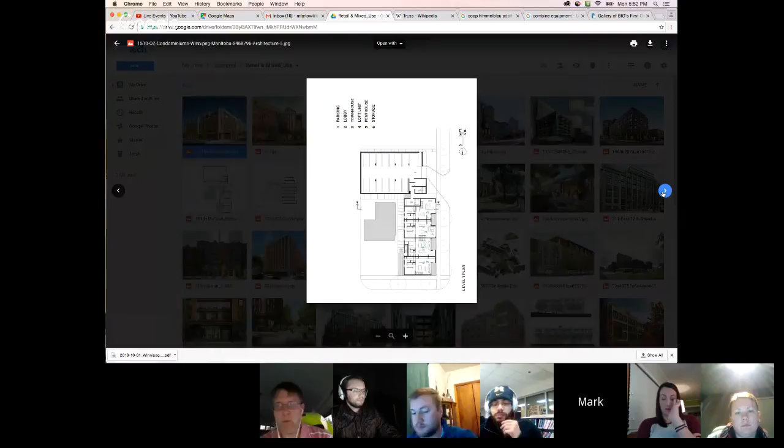And the building steps back from the street, so that from the street, this building only reads as a 6-story building because the top floor is held back. Oh, I love this building.

This is again a very simple strategy, a very simple brick volume, sitting not concentrically on the base. It's cantilevered out over the sidewalk, over this retail promenade. You see the soffit with the downlights in it? So that's like a 6 or 8-foot, maybe 10-foot cantilever that maybe finds some resolution back here.

Or maybe, because I don't know this building that well, maybe this skin down here is in the same plane as the brick skin above, or maybe just like a 1-foot, 18-inch offset, but then it splays to a greater dimension, therefore to a greater cantilever as we move out towards the street, so that the sidewalk is tapering just as the soffit above it is tapering.

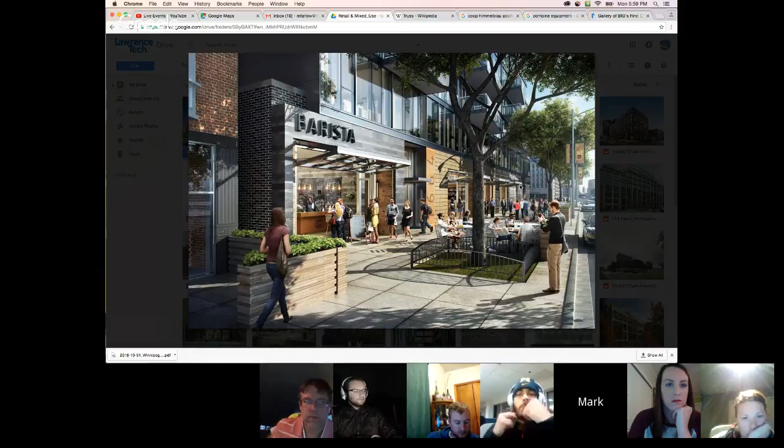They actually control the conversation in terms of what can happen on the ground plane, what can happen on the sidewalk, what can happen when the retail spaces open up, the way this barista coffee shop is described, with this hinging up and down door that creates a wonderful moment of theater every morning and every evening when it opens and closes, and how that connects us to the sidewalk, and how life on the sidewalk can engage with that retail tenant.

The same building again, up close. Terracing back at the upper levels allows the building to have a little bit more modesty, although this is a pretty hefty building.

I think this is actually clumsy in the way that it's rendered. The brick is a bit peculiar, and it has the vibe of an office building. But it begins to show you that within repetition, you can create difference and distinction. Notice how the spandrels in the middle part have this bronze color, while the spandrels everywhere else have the masonry lintel or masonry spandrel. These are moves you can make to reduce the heft of a building into something smaller, a little more graspable.

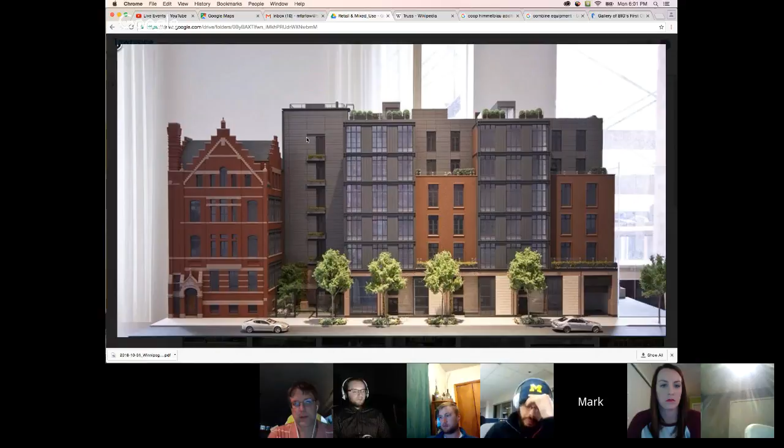It doesn't all have to be brick, doesn't all have to be bronze. Notice how this building is a series of simple, punched, large double-hung windows in a much larger orange window frame. I suspect the mechanical units are in the sill of each window. Actually, that's a grill rather than a window, so this is like a balcony, so these windows open up and you can probably step out onto that balcony. Notice how the jambs and frame of these windows are this burnt orange color, and it steps back at the top with little moves that reveal the rooftop.

Also notice this is just a simple, maybe corrugated metal sided building. As we move down the street, the building steps down to meet the context, and the figure-ground reverses. As it turns the corner, the gray field color becomes the field color for the windows, and the orange color for the windows on the front and side facade becomes the field color for the building. So I love this idea that with just two different colors, the gray and the orange, you create a really straightforward palette for a very large building.

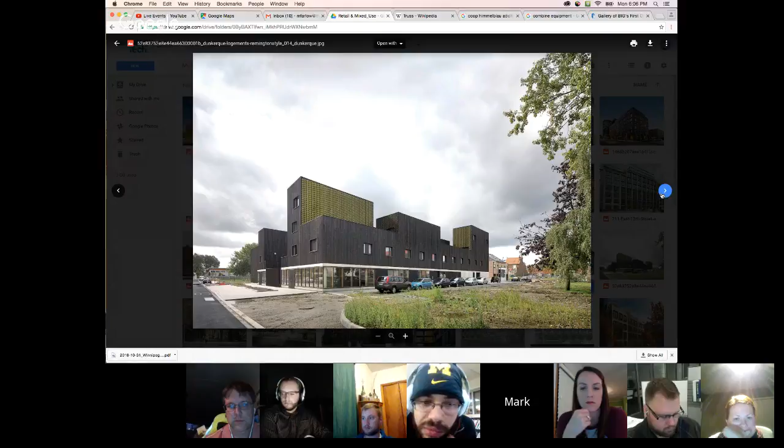This building is in scale with everything in North End. It may be longer, may be wider than some of the pieces you're looking at in North End, but this is right in your wheelhouse.

3 stories, 2 stories, 4 stories. Notice how the 4-story only happens in a couple of conditions, and it's always next to 3-story things, or next to a roofscape like here on this corner. Notice how the corner is all glass and opens up not only to the street but to a large sidewalk area in front.

The idea of letting the roof play a role in the building form, letting the building form relate to the context by mortising the mass so that volumes stick up and volumes recede, is a way of commenting on the rhythm and texture of the North End neighborhood.

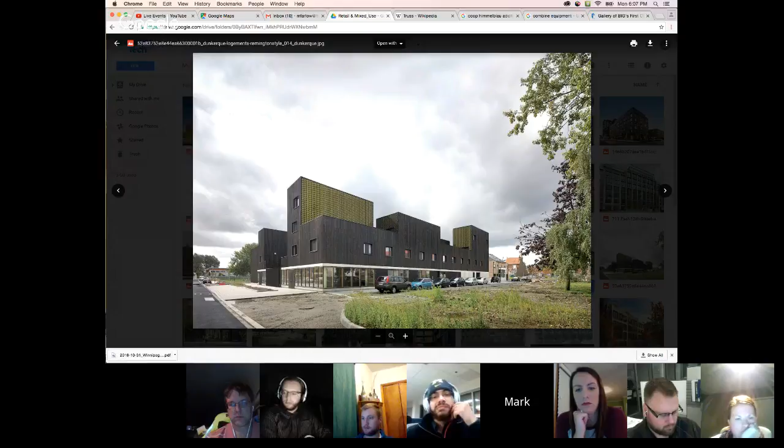This building is very, very simple. 3 materials, one of which I'm not even sure what it is, kind of a green, spongy egg crate facade. Maybe it's all wood in that chocolate gray. Very simple windows, very simply framed. Maybe not enough windows for my money, but that's in contrast to the ground floor retail, which is certainly all glass.

Bigger buildings tend to have a lot more detail. We just saw one a moment ago that was pretty rudimentary, highly flexible and active in its massing, and very simple in its language of materials.

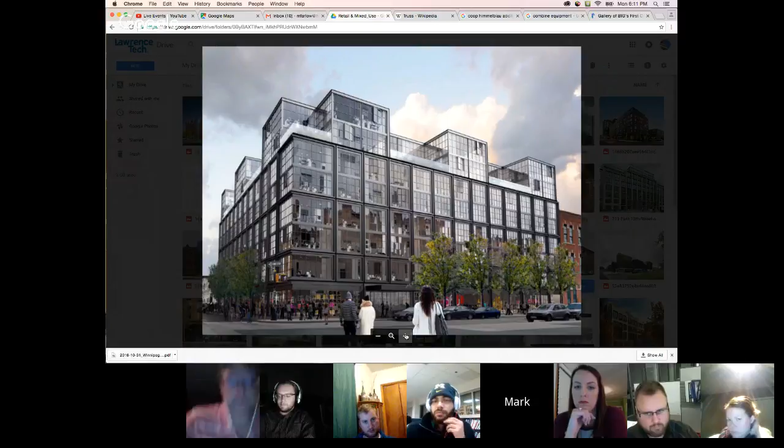Another building that we fancy. This is kind of trying to pick up on the warehouse aesthetic of the windows—much larger curtain wall windows inside their own frame, and then each of those large window elements is broken into smaller panes, reminiscent of an Albert Kahn factory or a Dudok factory in the Netherlands. But notice the roofscape—it's a much more active volume. This is something you can do on larger buildings.

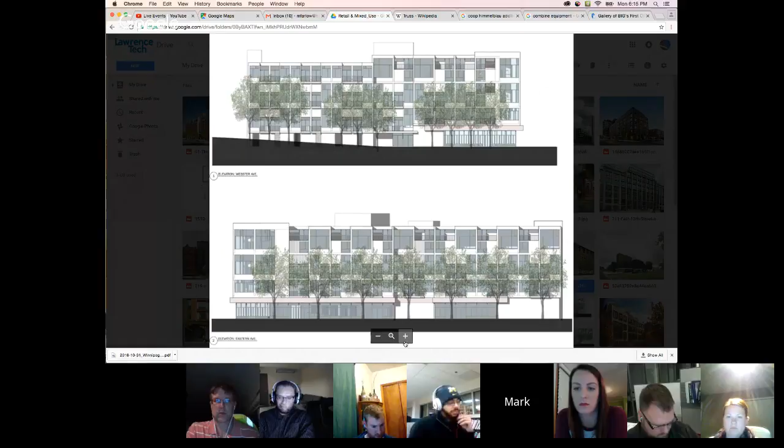Again, simple palette, right? You can imagine this as a 2-story, 3-story, or the 4-story that it is. It's actually a 5-story building, because the terrace is set back. This is a wood facade, with the wood running vertically. The windows are framed and extruded, giving some sense of shadow and depth to each individual opening.

All right, we'll go past that. And then just talking a little bit about, maybe thinking of the ground floor as everything from 15 or 20 feet, whatever your floor line is, thinking of everything below that line in any mixed-use building you're doing, maybe the corner spaces on your building, letting that be its own thing.

It can be quirky, informal, varied like you're seeing here. It doesn't have to be lowbrow, but look at the power of simple blade signs, simple strung lights, and simple front doors with a little topiary out front. It's actually a very attractive detail, and it allows the pedestrian to feel comfortable enough to walk inside.

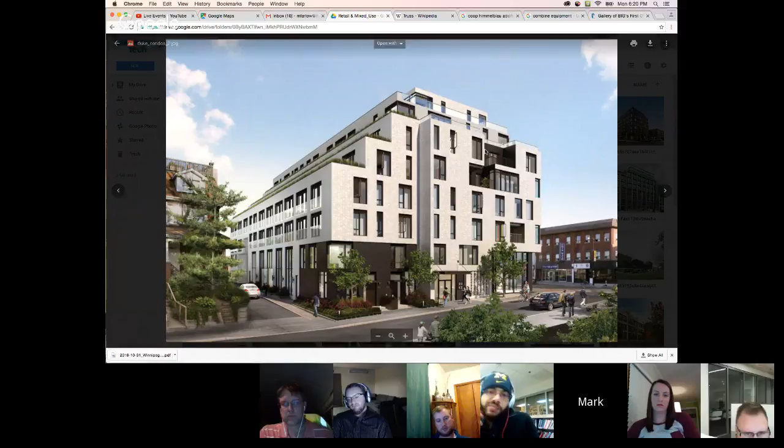I love this little notch here—it's like when I think of putting my key into a slot in my front door, I think about all the zigs and zags the key has in it, the shape of that male component, and then I imagine what that lock set must look like inside, and that's sort of what is happening here. So when I see these conditions in buildings, I think about how that might be relating to something across the street, how it might have a conversation with the context.

The same building, showing you the condition of the terrace and how those really are part of urban life. I'll blow that up so you can see it. This is a rendering, so we should talk a little bit about money shots as you look at these.

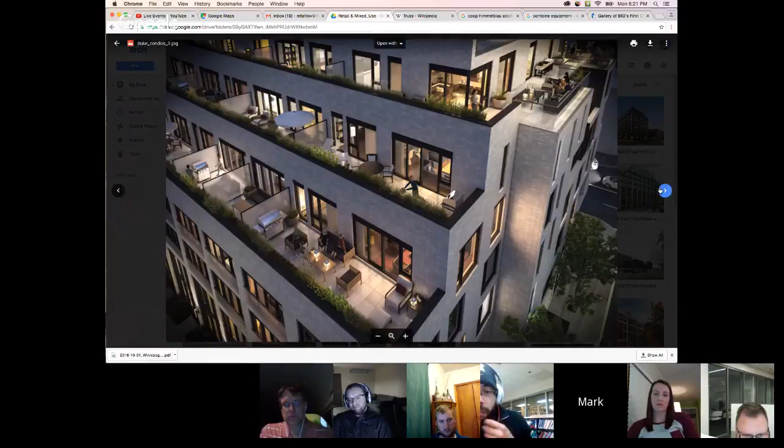The first floor. I love how the first floor is given this 2-story arch, right?

And that same view, that same space looked at from an oblique angle. Notice the sidewalk, notice the planters.

Remember the male-female keyhole that was happening obviously on that view. That's the one we were just talking about, but it actually starts to operate more assertively on the front facade in L-shaped and Z-shaped and T-shaped kinds of conditions, so that it allows this big hefty mass to be read as something smaller.

This building is in the wheelhouse and scale of your buildings. I think we talked about this last week. Mark? Actually, you showed us that.

Go ahead. Anna just texted me asking you to re-invite her to the chat. Sure, I can do that. She having trouble tonight? Apparently she lost power for a second. Oh, dear. It's back now, but... Okay, thanks.

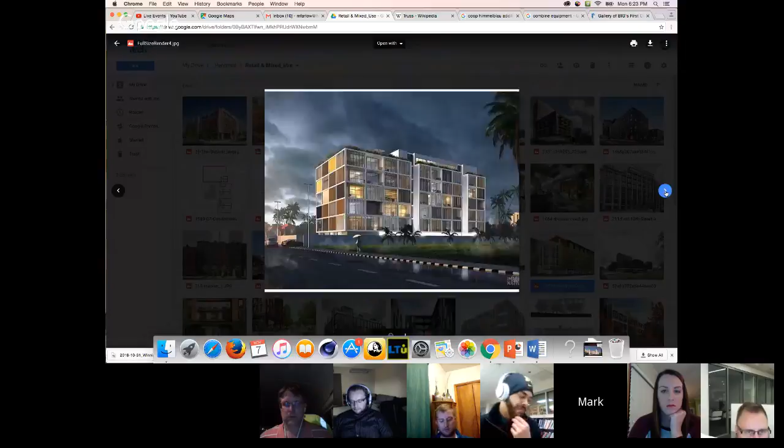It's a lovely piece. It's probably a Lumion rendering. The courtyard again.

And I think that was a rogue shot. Again, that sort of keyhole notch, that mortise, that operates very successfully, two buildings really joined at the base.

This is really interesting. When we go to Cincinnati, we're going to see a piece by Moore, Ruble, Yudell, the Steger Center, and it uses these double height dormers, or bays, rather, right? See these two bays here?

They're kind of like when you open a can of dog food, speaking of beagles barking, right? When you open a can, you pull the metal lid away from the body of that can, and it creates that kind of new composition, right?

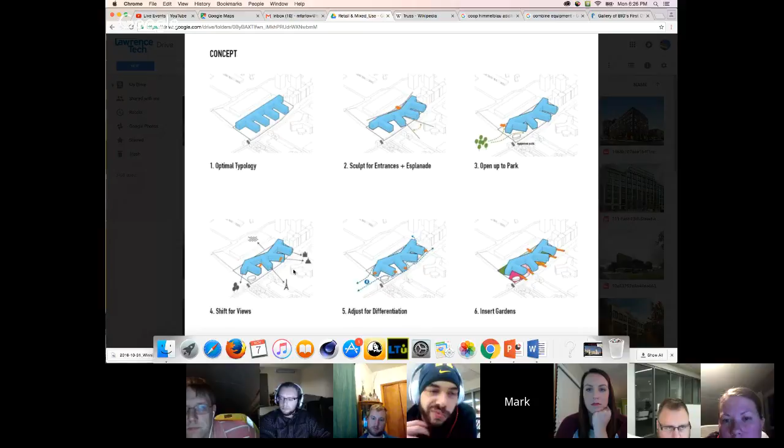That's what I was talking about with the mortise, the key and the keyhole, letting the architecture point to or react to conditions beyond, so that there's a kind of knitting that starts to happen between context and form, and then allowing the diagram to actually explain all of that.

And then you end up having a kind of drawing like these two at the very bottom that shows the synthesis of that. This is a really, really important kind of drawing for you to be doing as you move towards the second benchmark. It's a way of explaining how you actually created form and how you modify form, in terms of letting the context or program operate on it.

And that drawing, that series of drawings, was for this particular piece. Another terrific small 4-story apartment building. You know, this is again on the scale of the things you're looking at, right?

A 3-story building with a 4th floor that's set back. 4-story building on a retail ground floor to hold the corner, right?

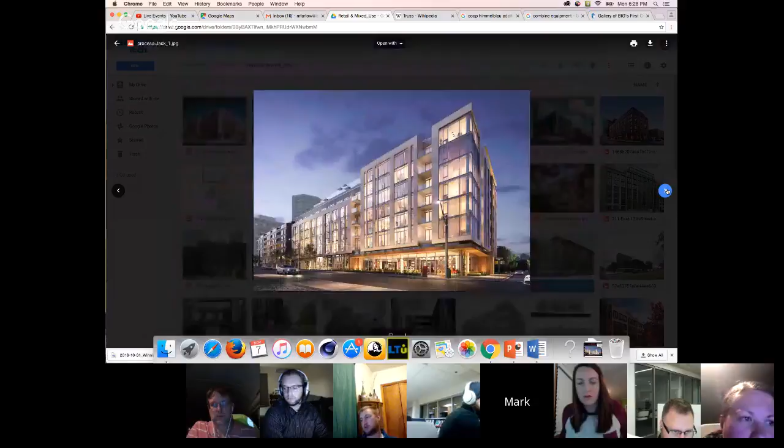The diagram, right? Taking kind of a pure program sort of diagram of your site. You all did these, you have these in your wheelhouse, you have these in your portfolio right now.

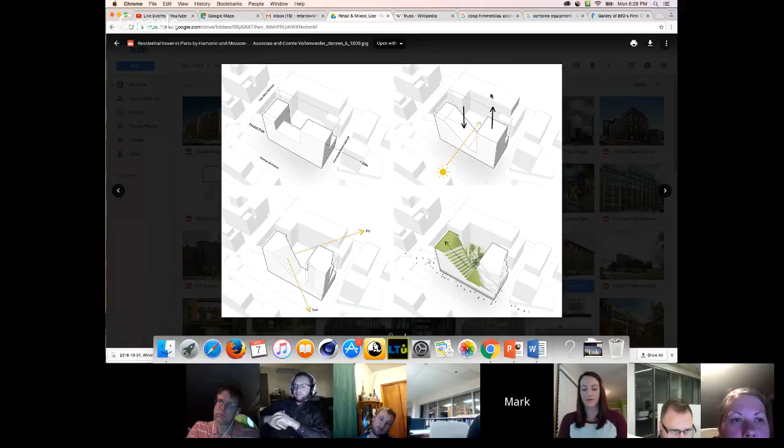Starting to think about how this property and this piece of land gets sun, so you push down on the mass here. That action of pushing, like pressing dough to make bread, when you push down on something there's going to be a reaction against that push. That means this piece is going to rise as this gets compressed. And then views, to one direction or the other, allow that push to get reoriented, and then the drawing is complete.

And there's that building, again.

This is actually a building by Richard Meier, his own museum for his models. His models are all upstairs, and this is all outdoor space upstairs. So it's just a 3-story building that sits next to much taller properties to the left and right. Again, real simple materials - just brick, metal, glass. But notice how the brick has its own detail, so you get these little moments in the vertical where it's rotated out to give a lot of texture. We saw this one earlier, and I think that's it.

I wanted to have this conversation tonight to open up the palette a little bit, to make sure that as you move into your work for the 16th, you're thinking about a lot of things right now - certainly the floor plans, the units, and the site plan. That's all stuff you've been thinking about, and that's great. But now you need to be applying that same rigor to the architectural outcome - the elevations, the massing, the three-dimensionality of this building, and the materials it's going to be sheathed in, and the way you can start to imbue those new questions with more design rigor.

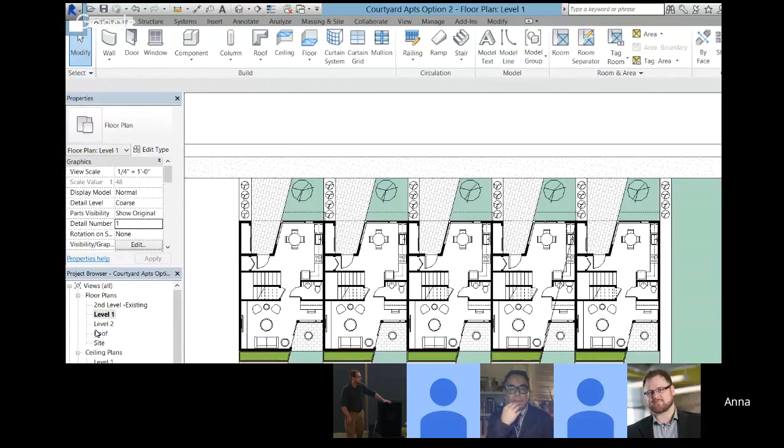Because as I was looking at it in elevation, like you had been talking about, expressing the vertical, or expressing the individual units more than anything - the way that I had it, it really was becoming kind of difficult to break that up. So by putting it back, I was able to express like, okay, these are the individual units, and it worked better with what I was trying to do with the roof line as well.

Can you orbit up? Can I see this balcony roof? Yeah, do you want to see it in 3D? Yeah. So I did the butterfly, and then I just took that little corner and tilted it down, so it still speaks to the gable roofs without being a gable roof, you know? And it kind of helps to further express the individual units.

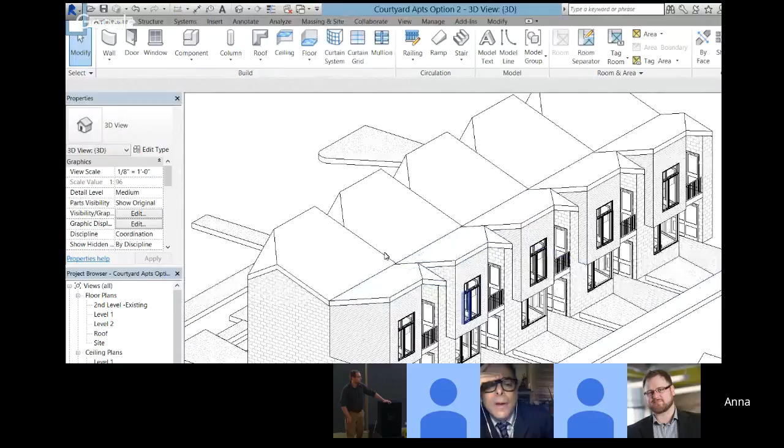So can you rotate around even more? It looks like that, I see. This is very interesting - can you rotate all the way around? I want to see the back. Oh yeah, the back side, I essentially did the same thing.

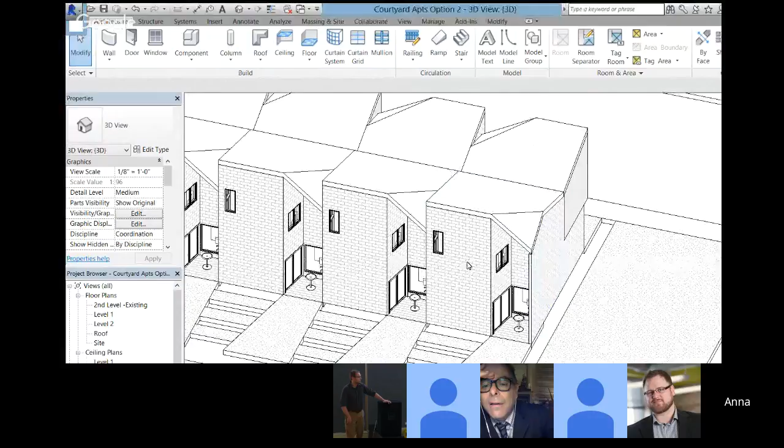The one spot that is a little weird is this far right corner, kind of highlighted right here. Well, can you slide your model - your cursor, can you see? I actually like that. Yeah, because initially there wasn't this wall here, and the roof came down, and I was like, okay, well, I got to do something because it looked obviously weird just having the roof. Where is your ceiling in all of this?

This is the second floor ceiling. What's the second floor ceiling line? It's technically here, let me go into elevation - is it just a few feet? Yeah, there it is. So it's really at the transom. So this roof that comes down is really at the ceiling line. Yeah, the lowest point there, where it tips down. Yeah.

Can you rotate counterclockwise in elevation? Oh, okay, counterclockwise. So you want to see? Oh man, no, I'm confused. Sort of want to see the... You want to see how the side profile is? Yeah, but I want to see the architecture in that elevation. So I don't want to see it as a pure elevation. I don't know if that makes sense. I want to see the elevation obliquely.

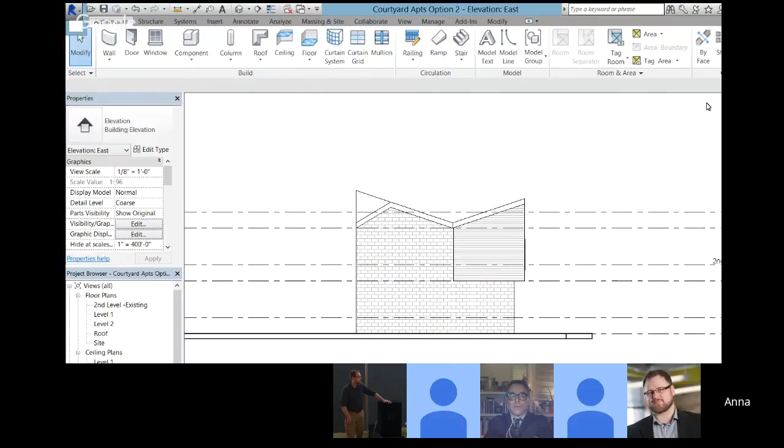Okay, I wonder, so rotate it like 10 degrees. 10 degrees, oh boy. That's the 2D wheel. I don't know if I know how to do that. Let me see, you're a Revit master. I thought so, but I don't know how to do that. Can you just go to 3D and rotate?

Yeah, so get me down to the eye level, like there-ish. Yeah, now keep turning. Slow down, keep going. Is this the side I want to see? This is like the back. You want to see the front? Go to the front. Okay.

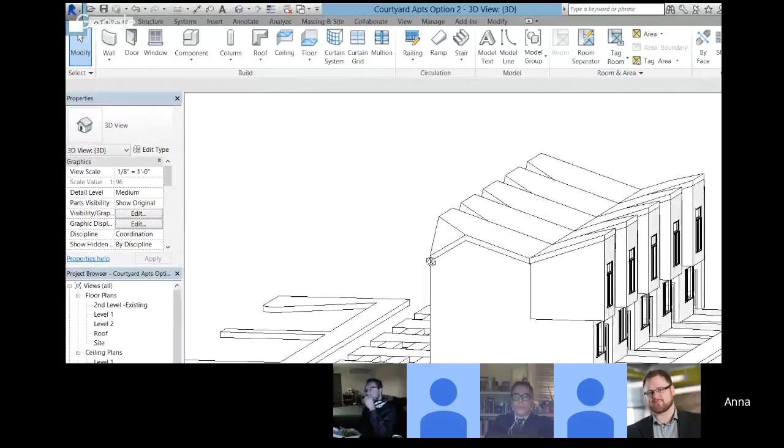I want to see the other direction, so rotate all the way around. Okay, now slow down. Oh, too far. Yeah, and get me at the eye level again. And open it up a little bit more, I want to see more of the facade.

Yeah, so you see where that roof comes down and it hits the, it looks like block, where your cursor is. So there's like a big drain issue there, so you'll have to have a downspout there. And then this change of masonry to siding is kind of interesting.

I feel like there's some line work that you're missing there. And you also have, in these things that project out, masonry and siding kind of intersecting. Wherever there's wood siding, you're going to need a bottom board, and you're going to need a corner board unless they're mitered, and you're going to need an end board, like a vertical end board.

Do you follow what I'm saying? So you need to indicate all of that. Trim, essentially. Yep, unless you have a different attitude about wood that you're trying to talk to here. The other thing is these fascias are kind of snug to the wall. They would actually at least be one or two boards proud of the wall.

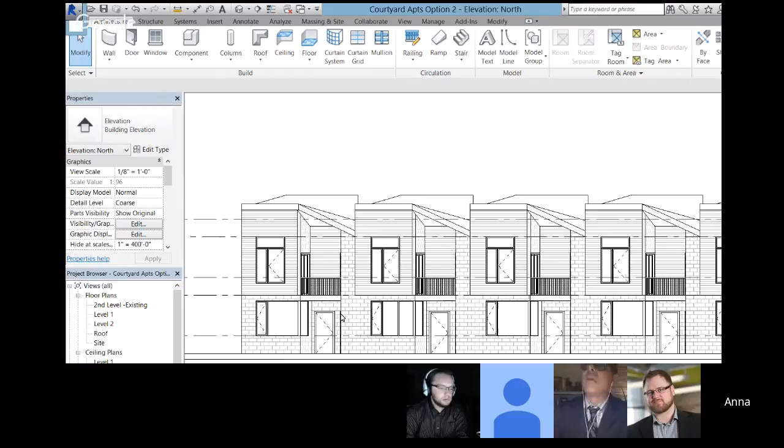Okay, let's keep going on this then. Are the roofs going to be like a metal skin, like a standing seam roof? I'm not entirely sure yet. I'll go to the roof plan. I have it shown right now, like with the texture of a typical shingled roof, but I definitely don't want to just do an asphalt shingle.

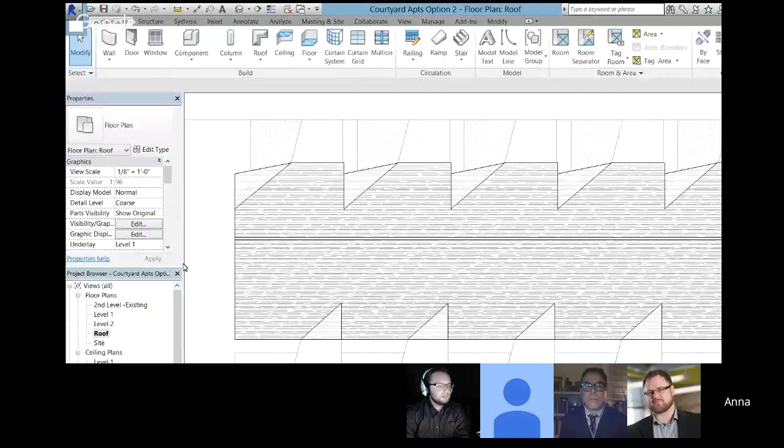Metal, I think, would be interesting. It would be interesting to see how that works with those little angled pieces. So that's something I wanted to look into. For now, I just have it shown as is, just to express that it is a roof. So I hadn't actually considered metal, I was trying to think - yeah, I might consider like a standing seam metal.

Because you can let the water run to the low point, which is that spine - you can raise that spine to the middle so it's taller in the middle. Metal has less friction than asphalt in terms of water, and you could create a profile so there's a high point in the very middle, pitching to the east end and west end. Where the fold of the butterfly meets the west wall and the east wall, that's an opportunity for a scupper and a downspout from a detail perspective.

Yeah, that's what I was thinking. With the butterfly roof, that's kind of how you would typically route the water, so I thought that would be kind of cool. And you would have crickets up there in that butterfly - that's definitely there, and you probably want to draw that, but acknowledging how that water gets off with some sort of gutter and downspout is going to be important for some people.

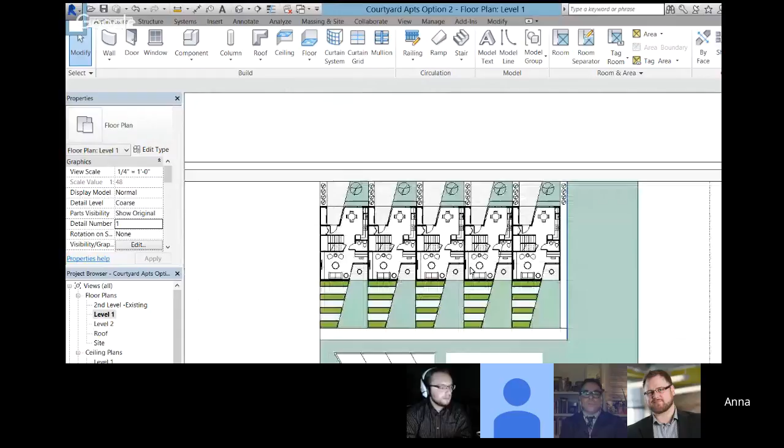Okay, what else do you want to go over? I started also looking at the existing house and the area surrounding it. So these two wings coming off of it, I have to play around with their form a bit and their size, but I actually took the greenhouses out from behind the residences and left that as just gardens, so that way each unit, like you had talked about last time, you know, there was one unit that didn't even have its own lawn.

Right, well, just because the way they were flipping and flopping.

So, going back to this layout allowed each unit to have its own little grassy area, and then a set of garden beds.

At first I was keeping the greenhouses there, but then when I was looking into some ideas for the existing residence, I actually found this cool house I can show you in a minute - it's actually a house that's a greenhouse, people live in it. It's pretty cool. So I started to think of how I could incorporate that idea without completely tearing apart the existing house.

So I was looking at kind of these natural moments where I could insert a greenhouse. There's that one to the right, there's that little curved moment that continues all the way up to the second level - I thought that might be a natural spot for that insertion point. And then to the left, there's that part towards the front where it dips in, so I thought that might be a good spot to put a larger greenhouse.

So I think I want to play with the shape and the length of them, because they feel a little awkward.

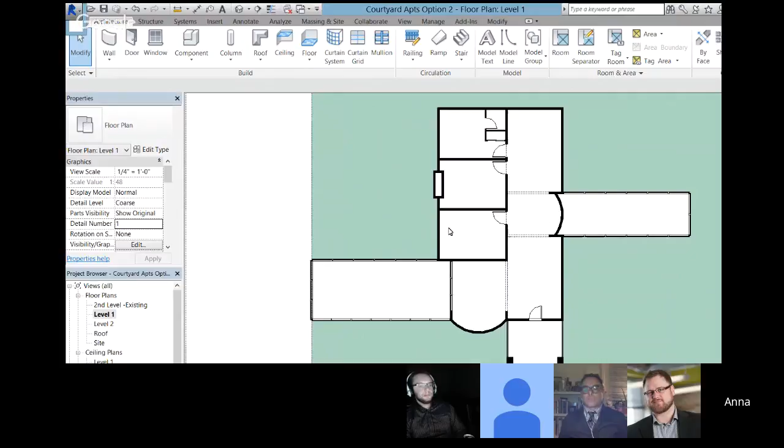Well, there'll definitely be traditional greenhouses where stuff is grown, but I also saw them as places where it'd be like a community engagement space. That could be where presentations are done, where teaching happens, like if there was a farmers in residence sort of program, that could be where they're teaching. I liked the idea of the greenhouse because it's something that can occur year round, in Michigan.

I want to also have, flanking those greenhouses, some exterior gardens, but the greenhouses are nice because being in Michigan we can use them year round. They would be for whoever's in-residence as a place to do their own research, but also a place of community engagement. Those would be the most public components of the building, whereas the more internal spaces are going to be a bit more for the in-residence.

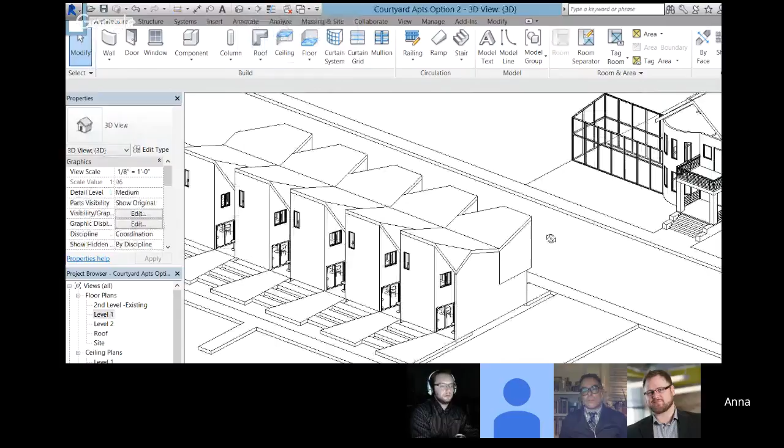I can go to 3D view. I still have a lot of stuff to work out, but I was playing with - I'm going to play with the shape of the greenhouses, but I want to have the sloping roof, partially because that's kind of what you typically see with a greenhouse. It's hard to tell here because it's a pretty gradual slope - I may have to increase it a bit more, but I wanted it to speak to the sloping of the butterfly roof across the street.

And I played around a little bit with the front facade, so that double height curved bay, those windows are existing - there's some details I have to add. Can I orbit around this? Yeah.

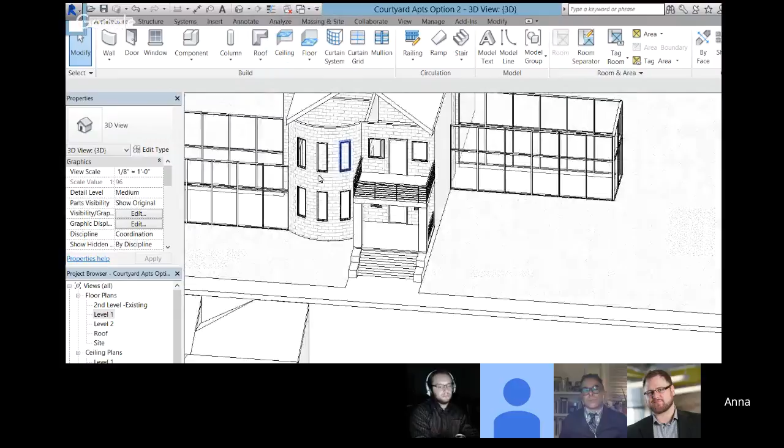So I have some roofing details and stuff to add. Right now it has just a porch, so I'm going to create a balcony that can be accessed from the upper level. I was thinking of doing the same thing in the back as well.

Not necessarily that same layout, but I feel like the width, or the depth, of these greenhouses needs to be narrower. I feel like the front facade of that west greenhouse needs to be set back a foot from that corner.

Yeah, because it shouldn't be right at the curve, it's too clumsy that way. Do you see what I mean? Oh yeah, definitely. As I drew them in, it was helpful to start to visualize how they look, but I want to play with them so that they make sense.

And I may have to make them maybe not as long, I don't know, that's another thing. I guess it would help to know what kind of program is happening in there. How does that measure up? What does it look like in plan? Can you go to the other orbit all the way around now and look at the other one?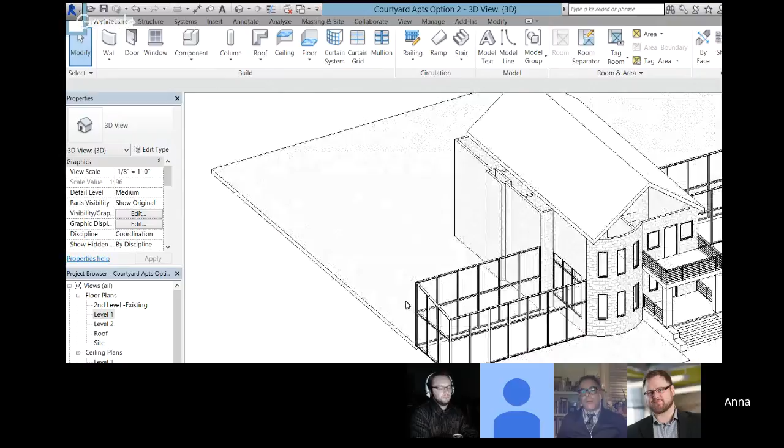And similarly, this one needs to be even wider or deeper. So this one actually needs to be a little bit more away from the curve. It's weird how that

bay window is inset like that. It is, it was kind of a strange but unique feature on that house, that it's inset in that way. I don't know what the reasoning was for that. I suppose if they had a setback of some kind. Yeah, maybe, that's just weird, I can't wrap my mind around that one.

So you're saying make this one deeper, make the other one shallow. Yeah, more, just enough to make sure that they resolve themselves in terms of where they start off of the existing house. Do you think they should start in the same spot, or is it fine that they're staggered a bit? I have no problem with their stagger, I think it relates to the interior plan maybe more than anything.

Although I think that bow is going to wreak havoc on the roof plan of that greenhouse. Oh yeah, that I know. I had debated about maybe just saying, okay, if I were to remove that entire bow, then that ends up being just an opening, and infilling it with something else. But I realized that's going to be a weird moment where that meets with the greenhouse.

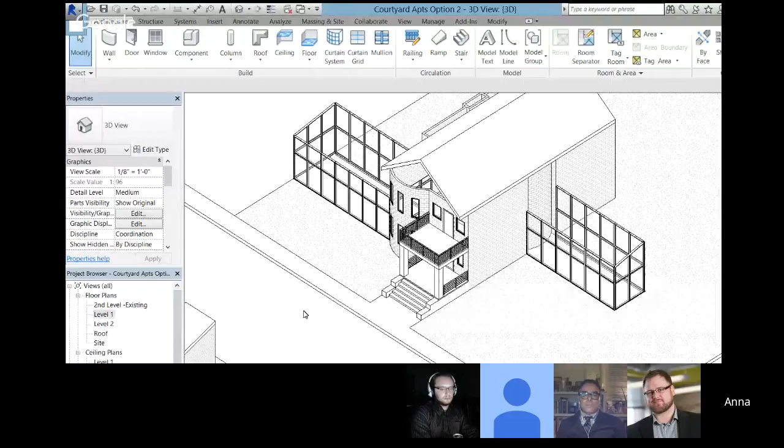So you may need to do a gasket there, or you may need to move it so that it's not at the bow at all. So I would look at that. It could still address it, but maybe not align. Maybe the back edge aligns with one edge of that bow.

Is this model also kind of deficient on the number of windows happening on the east and west facades? Yeah, you need to catch that model up. I didn't add any windows to what I had initially because I was playing around with the greenhouses and laying out some walls in the interior. So yeah, I definitely am going to add that, because I think that's going to influence things too.

Yeah, that's true, if I look at where the existing openings are. I also feel like the site is still kind of the leftover space, and I don't feel like you've been thinking about the program for it. I know you're saying these greenhouses are the first kickoff in the football game, and there's a lot of game left to be played. But I like the idea that you start with the greenhouses as a way of setting the tone for what you're going to do in this yard to the east of this building.

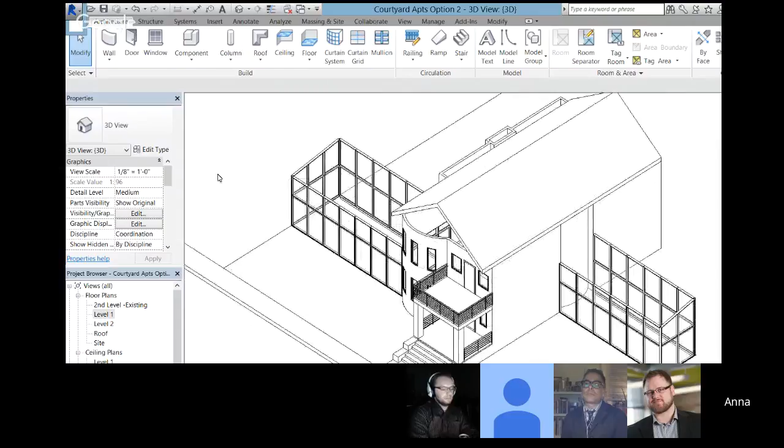But I feel like you need to be moving into that really quickly. Yeah, I know, I agree. What is the ground plane like? What's happening in this vacant land? Yeah, there'll definitely be some garden beds, but I do need to look more into, now that I've started with the greenhouses, creating some other spaces for community engagement. So it's not just gardens, or it's not just lawn. Right.

Yeah, no, that's definitely not my intent. Maybe a little bit of grassy area, but the intent is definitely for this to be less residential. So yeah, I think I'll play around with the greenhouses a bit more and really develop that site.

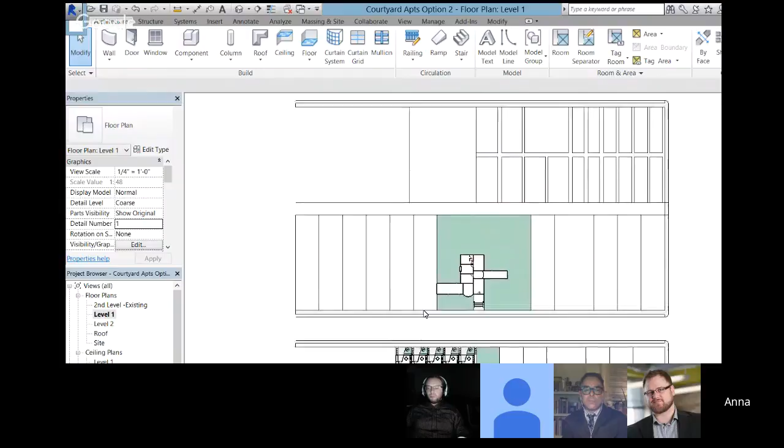I started laying out some of these lots. I'm going to block out some footprints for some of these adjacent houses and start to show more detail. This upper right is where the Muffy Gardens are, so I'm going to add some more detail there as well so that it can all read together. And then looking more at the overall as well, I think I definitely have a bit more to do with the site for sure.

Okay, well, I'll keep moving and take advantage of the time. I'm happy to talk to you over the weekend if you have any questions, although our time is really going to only be available on Sunday in terms of my availability because I'll be traveling the other day, but I'm open to that.

All right, anything else, Anna? No, I think that's all. I think I've plenty to do.

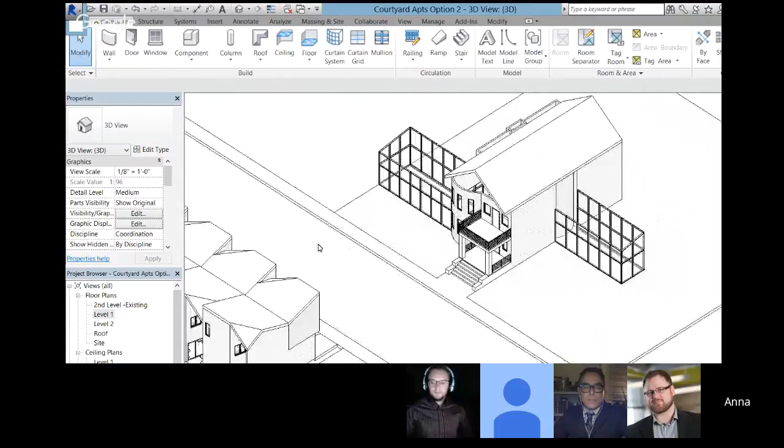So yeah, these townhomes are really kind of quirky and interesting. I'm very attracted to them. Keep fleshing them out in terms of the windows. I also feel like the windows are still kind of like stock windows - like you haven't gone through the process of saying, okay, now this is where they've got to go, but how big can they be, and how can I start to compose them so that... and what is my attitude about windows in wood walls and windows in block walls, and what's going to happen to the windows as a vocabulary element. I think once you start going through that process, those are going to get really interesting.

Yeah, that's something I hadn't thought of - just the framing of them, and it's not just what they're punched into in terms of wall surface, but it's also the size of the windows. That's something I hope you also found in Alison Brooks's work, is that you start to play with the proportions of these things, and they really start to impact the architecture.

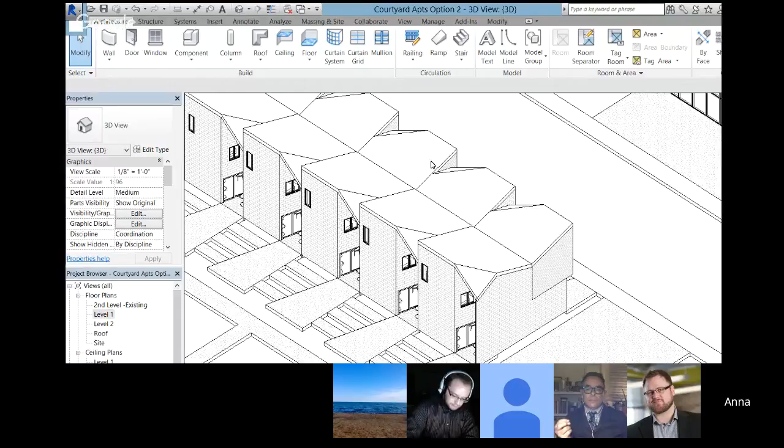Oh yeah, absolutely. That's what I was starting to do a bit more in the front. I want to play around with those a little bit more, but then start to carry that through the sides and the back as well, because yeah, definitely a lot of these are very kind of standard.

And I'm not saying that it needs to be all glass. I'm saying that there's nothing more powerful than a small window in a big wall. But it's also got to be balanced by big windows in small walls, for example, or in other places, so that everything's telling a story.

Right, okay, cool, I'll let you go. All right, thanks for the input, Anna. Tell your husband to stop ironing tonight. Okay, I will. Have a good night. You too, thanks.

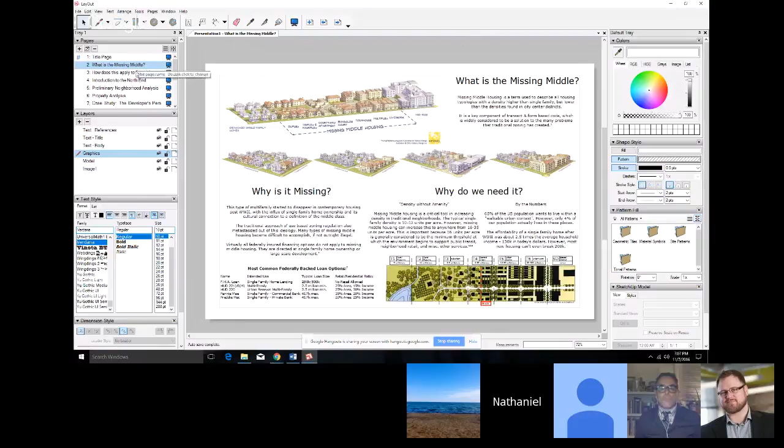All right, so we left off last week with me reevaluating the research and representing that effectively. So I think I've successfully finished that up. So you saw this last week. I don't know if you saw this one last week.

This was just combined - this is essentially more for a reference for me at a later date. I was combining everything that we did as a group together, and I'll probably breeze through this when it comes time to present, but I want this here. It's a good placeholder, and you need to have this anyways. Yeah, and I'm referencing back to it a little bit later anyway, so I put it in.

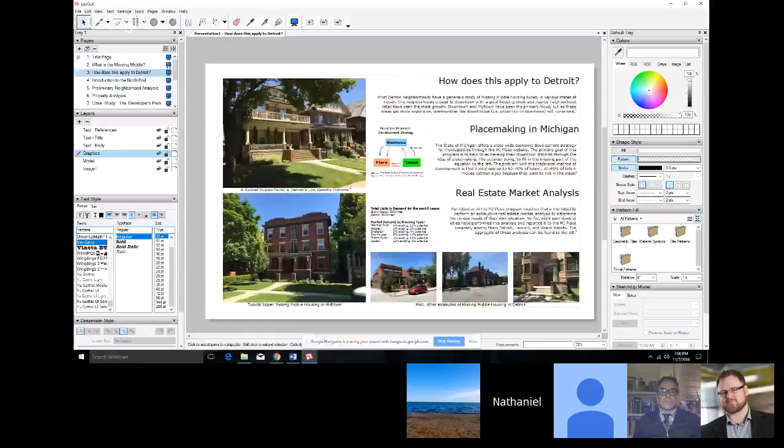Then I redid this a little bit, made it clearer what was going on with what was happening. Not too much, though. So I started with the basic research of missing middle, switched to an introduction to the north end, did a preliminary. So then I zoomed into the analysis, property analysis. You've seen all these things. I'm just condensing it all. Nice.

Then these are nice, consistent, clean plates. Yep. So this is what I was focusing on. I've got up to 10 pages in now.

So I started looking at the case studies and trying to integrate them in. This is the single most formal case study that I was looking at.

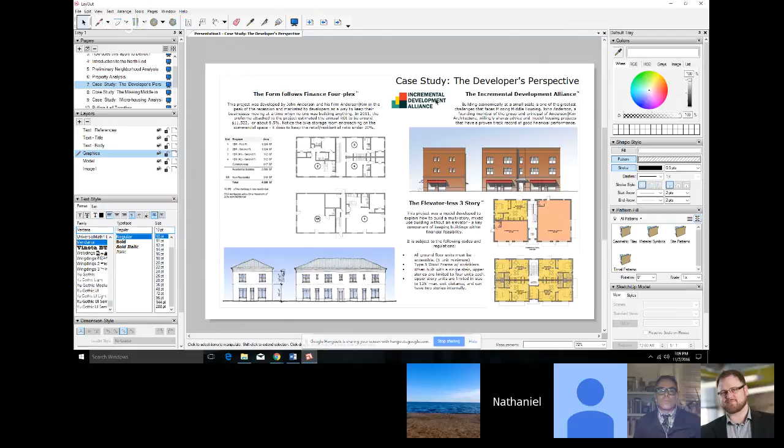The Incremental Development Alliance was recommended to me by somebody from Dan Parolek's firm. When I was watching one of his lectures online, he had said that getting missing middle housing financing was incredibly difficult, really tough. So I sent him an email, or his firm an email, asking them for some more references as to how we can deal with that. Fantastic. And he sent me a few links on his website, which were more or less useful, but this was really interesting. So the Incremental Development Alliance was

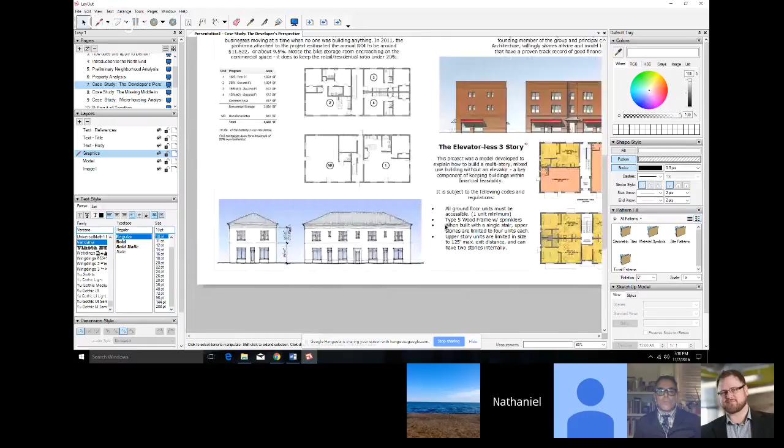founded by John Anderson, who is an architect somewhere in Nevada, I think. But what he specializes in is working with developers, and I think he's got his own development portfolio, his own real estate portfolio as well. So these are essentially stock projects that he markets to developers, and then changes and modifies them on a project by project basis. So there's some really interesting things that are going on with these and how they work with building codes and regulations.

Let's start with this one right here. The elevatorless 3-story. So how do you create density while still being able to afford what you're building? Because once you have to put an elevator in, you add a significant amount of cost, and if the rents aren't high enough, you can't even afford to build the building in the first place.

That's right. So working with the codes and regulations, this is one of the solutions that he came up with, and he gives these out for free. I'm just referencing back to them. So what his solution was to put a single ground floor accessible unit in. That's right. Which is all you need. You just need that one.

on the ground floor. The only problem is if you do all commercial on the base floor, in terms of ADA requirements, the first floor becomes the second floor. So you need to put an elevator in to get somebody up to the second floor. But if you have a ground floor unit, that's residential, you don't need it. So the way he's done it is he's got the 2 pink retail spaces and the yellow ADA unit in the back. That's exactly right.

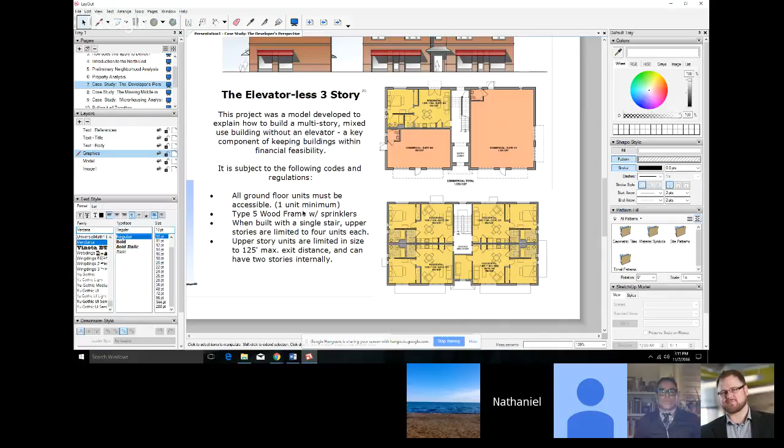Yep. And some other things here, low cost construction with wood frame and sprinklers allows 4 units a floor and 125 foot max exit distance from within the unit. So from here to the exit, well, sitting on the corridor, toilet, through the door, around the bed, out the door, 125 feet to the front door. That's the maximum travel. That actually went up about 5 or 6 years ago from 50. It used to be 50 feet. But then the code realized that people have walk-in closets and big bathrooms, and that even in nice condos, it was becoming really impossible to do that. So they actually went to 125 from 50.

But so we do 3-story apartment buildings all day long, but the best ones are the ones where there's at least 1 unit on the ground in a chunk like these 2 here, separated by the stairway, because you don't need 2 stairways and you don't need an elevator so long as you have ground floor residential.

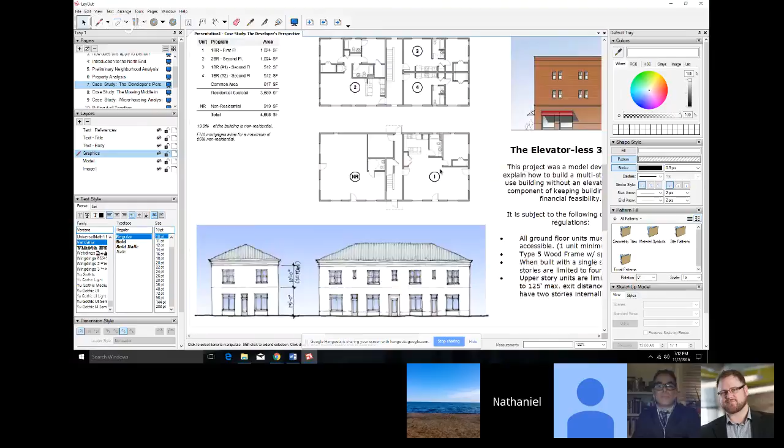Yeah, and when we move over to this one, he worked on this one in 2008 or 9 or something during the economic downturn. He calls it the form follows finance fourplex. Cool. Because essentially you can build it if you can get $1 a square foot, I think. So right, if you can get $1 a square foot, you can afford to build this, is what he said.

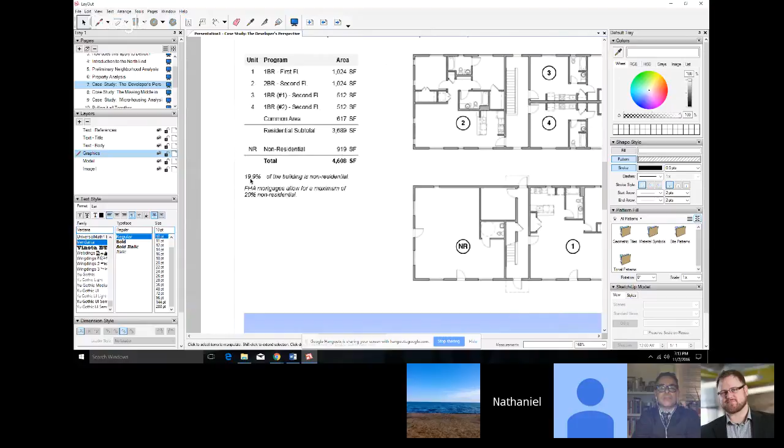Right. So what was particularly interesting about this one is how he was navigating his way around the FHA mortgages. So if you take a look at the ground floor here, he's got his non-residential unit right here. Yeah. And he's got the fourplex over here. And the only problem is if this entire thing was commercial, it would be over 20%, and that can't happen in the FHA mortgages. So what he did was he put in an outdoor storage slash bike closet for the units and brought that square footage below

20%. That's so cool. I don't know. When I was looking at these, I was just really fascinated by how he was using the regulations to his advantage to get what he wants to get done. And this is exactly what we do in the office.

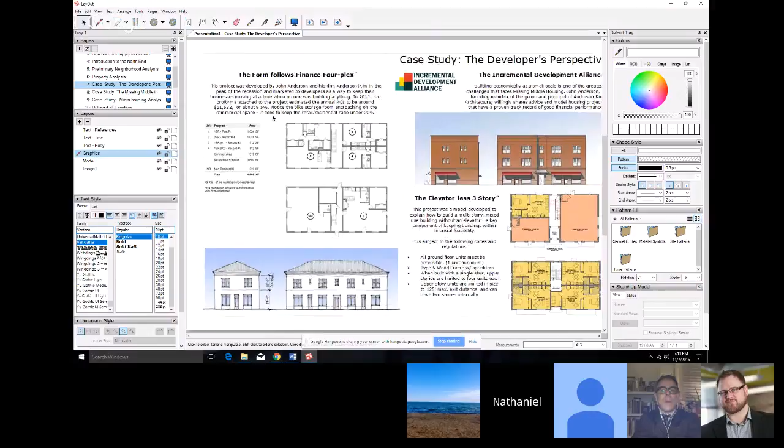So, yeah, I found this to be incredibly interesting. I'm glad. I was interested in learning more about some of the work his firm does, so I looked at his website and found a project similar to what I have to deal with.

I see, especially the thing on the left. The site plan has the same sort of depth issue, right? Yeah, this particular site on 14th Street would be the equivalent of facing Brush. Instead of facing the side street, this house decided to face the larger street for whatever reason.

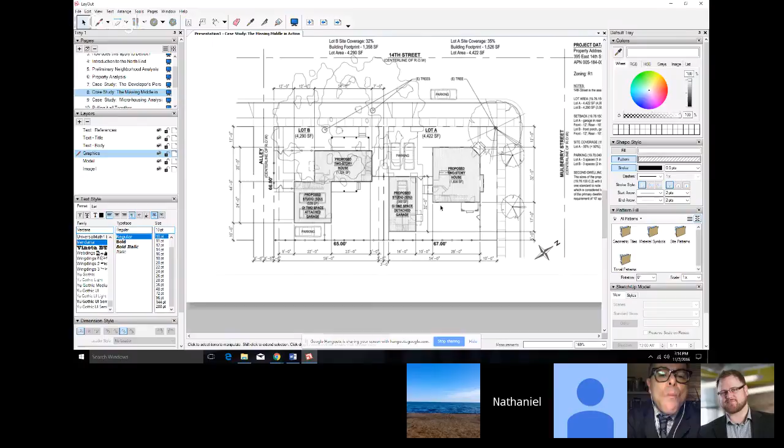He wanted to split this into two units, so he split the lot. He's got two units, a studio space above the garage on both, and then a two-story single-family home. The carriage house is attached or not attached, with outdoor parking in both cases. You see how the building and the driveway on the left is to an alley.

Very interesting. I'm sorry, I interrupted you. Oh no, that's fine, I spent a lot of time looking at this too.

He even managed to get a backyard on this relatively small unit. Even on the corner unit, he's got a small yard. Granted, this lot is larger than the lots I'm dealing with, but it's a similar condition where I have to maneuver how these buildings relate to each other and the property lines. He's respecting the setback and taking advantage of the alley, rotating garages to either serve the alley or the front, and if they face the main street, he sets them back, right?

He occupies the garage with a stairway. I like how the stairway is ghosted in the floor plans of these garages. And they're actually ghosted in the units themselves too, which is kind of interesting.

And he's got your big ass tree too. Yeah, I guess he does, doesn't he? Didn't cut it down, so that's good. And these drawings are just beautiful, these elevations are exquisite. Yeah, this is an older project, I think, so these were just the graphics he had available online. I'm glad you found these.

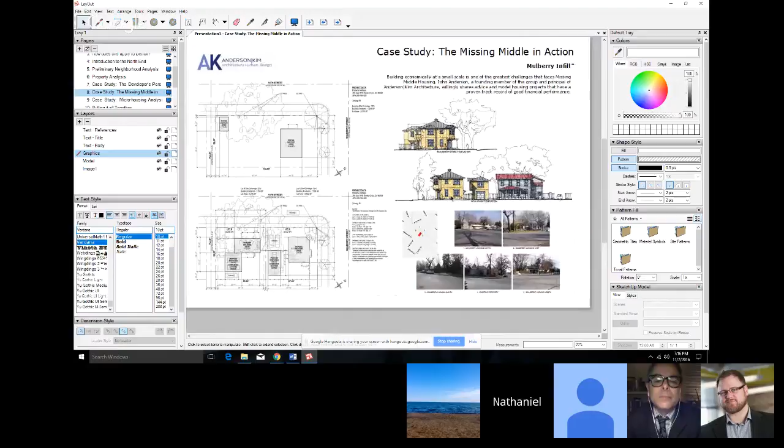Next, I found one of the firms whose website I occasionally browse. They've got a blog - Build LLC. They're one of the more prominent architectural firms specializing in development in Seattle, and they do a pretty good job of talking about what's happening in the city and what they're building and why. A while back they did an analysis of micro-housing.

So I'm not claiming credit for any of this, this was them, and I'm just recommunicating their analysis. Supermax prisons - they were just examining the square footages of these units.

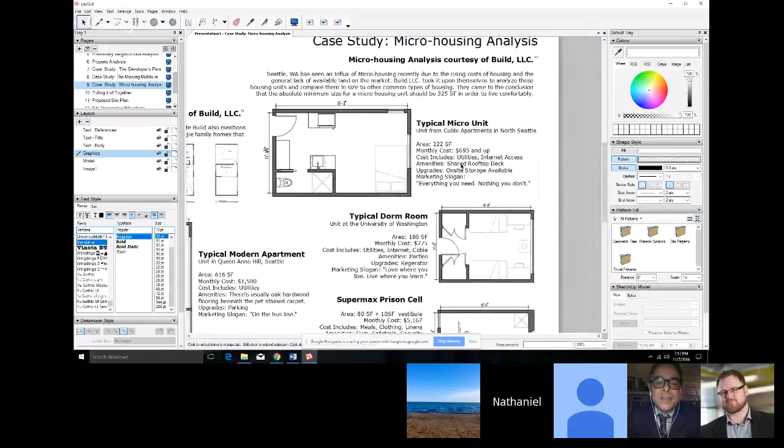When we're looking at micro-housing, this is a typical micro-housing unit from Cubix Apartments, which is apparently only a few blocks away from where they are - 222 square feet, which is really, really small. Then you've got a dorm room, which is essentially the same size as this micro unit, but it's twice the density.

Then they looked at a typical modern apartment with a single bedroom at 600 square feet, and then they put the Supermax prison cell in there too. Interestingly enough, the Supermax is, of course, the most expensive.

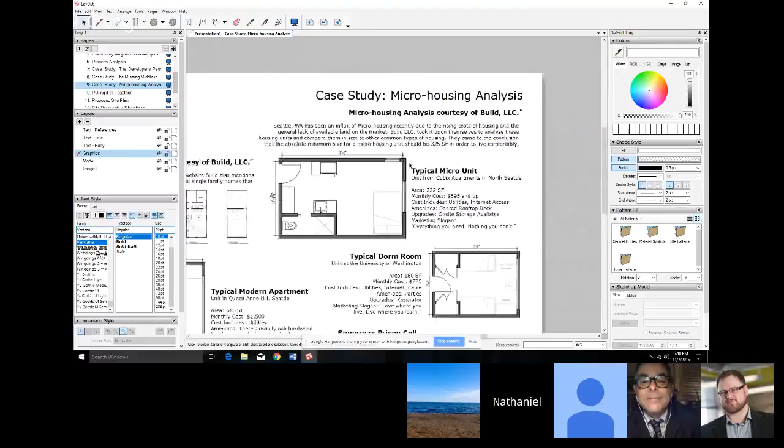So what they came up with in their analysis is that they determined this unit was a little bit too small for their liking, and they wanted to recommend a minimum micro-housing unit size of 325 square feet so that we could get a full sink in the restroom.

Did you see the new units in Curbed by Bedrock and Kramer Group? I have not. Why don't you fire that up and pull that up? All right, what am I searching, Kramer for Design? Kraemer, Kramer Design Group, Microlofts.

It's a new project under construction right now, and it was in - so I want you to look at it in Curbed Detroit. Curbed, or yeah. Is this it? Yeah, but go down. No, that's their offices. Yeah, okay. Back, might have to go to their website. Go to Curbed, but it should be in the news. I'll search, yes, search there. What am I looking for? Micro loft, Kramer Design, micro units or whatever.

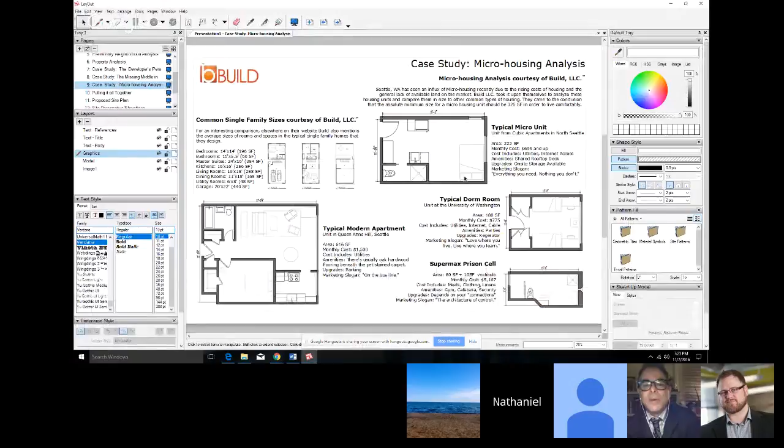At least in Seattle, anyway. And then, as an interesting comparison to that, they had another blog post where they were talking about their typical recommendations for single families. So they've got bedrooms that are essentially the size of these micro units, which is what. Wow.

So then I started to put all this stuff together. Shoot, this image is such a high resolution, I gotta turn it off.

There we go. So I started by looking at and mapping out those things, the money analysis that Mariah did, into a graph scenario. So I think it's relatively straightforward.

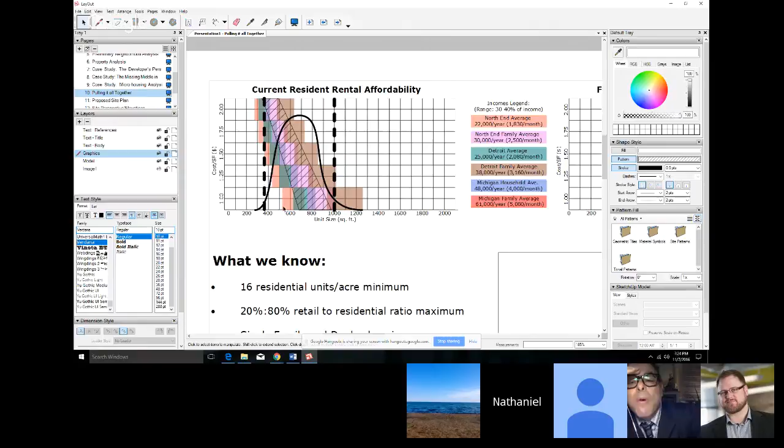Here, I'm worrying about the current resident rental affordability. So the North End average is $22,000 per year. And that rent is at $1 a square foot, assuming 30 to 40% of their income. That range is somewhere between 525 and 700 square feet that they can afford.

And then it keeps going from there. North End family average, the average Detroit. Right, and then I put the middle of that together, and then I averaged it, and I threw in a bell curve right in the middle here, so I'm not sure whether or not it's entirely relevant, but it struck me as helping me determine that the most units that I should be making, if I was focusing on making sure that the current residents can afford to live in these units, they should be somewhere between 450 and 900 square feet ish.

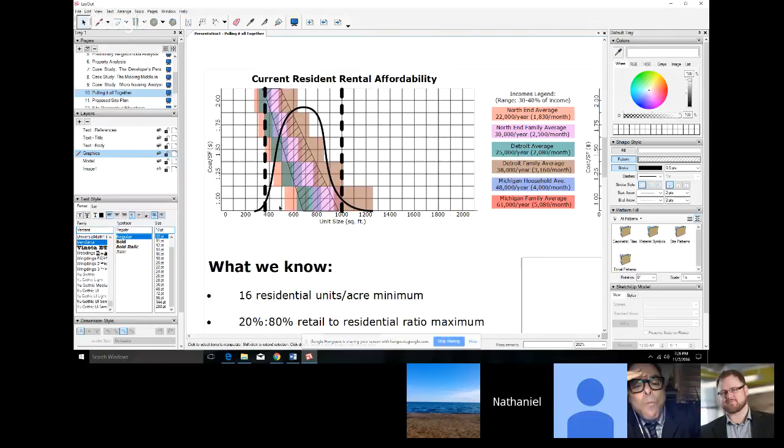So if we want to focus on the largest percentage of the population that lives there. But also, I think in Detroit there's an acknowledgement that displacement is wrong, and accolades to you for trying to create a product that does not displace people.

But even in new development like this, you would probably find only 20% would be set aside. I mean, you could make it 40% or even 50%, which would be terribly admirable, but that's set aside for the current resident profile.

So I did the same thing for the future resident, because I thought it was relevant. I don't know if this is getting built next year or maybe 10 or 15 years from now. If it's getting built this year, this one might be more relevant, but if it's 10 or 15 years out, maybe we should focus on the Michigan average rather than the current Detroit average today.

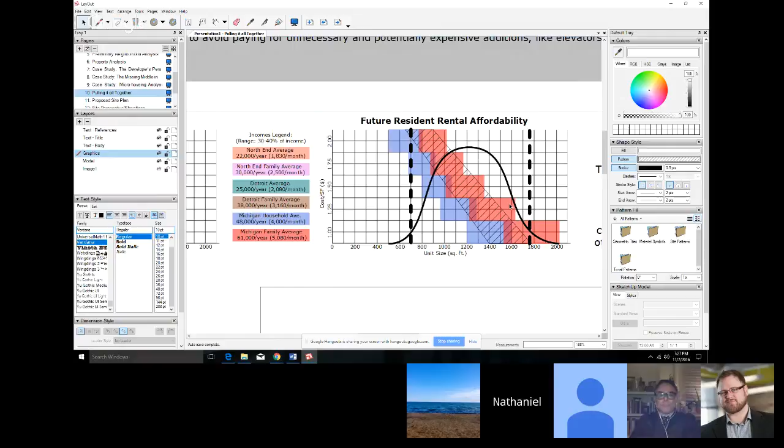So when we look at this, we start getting into unit sizes from 800 to 1600 square feet, which is essentially a single family home, which the North End already has a pretty significant amount of. So I don't know how much we want to focus on that.

So I guess when I'm looking at this, since we're focusing on missing middle, we should probably stay around 900 to 1,000 square feet max. Agree? Yeah, I would agree. That was the conclusion I came to after mapping this out graphically. And I don't even know if I want to put micro housing units in the first place, so I might pull that micro housing analysis out.

I think I should do some more research into the types of demographics that actually want to live in micro housing, because I'm not 100% convinced that micro housing has a place in a traditional single family home scenario neighborhood like this. If we were in Midtown, I wouldn't even question it.

I'm just not convinced that a family of 3, or even 2 people, would want a single micro unit. I don't know, I just don't see it.

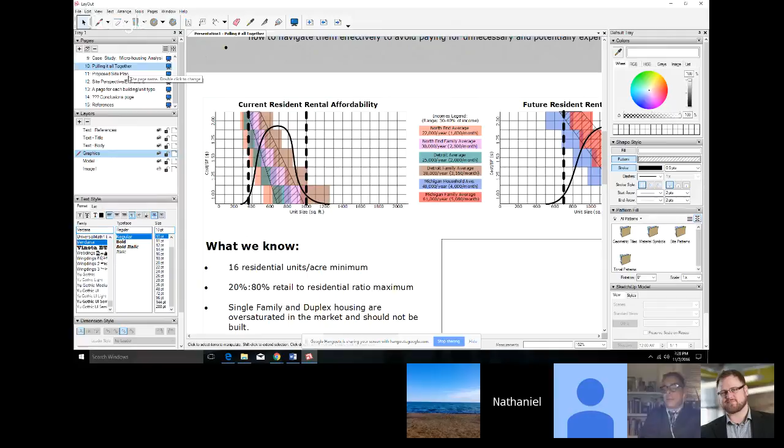Well, I think there is traction in that demographic, but it's probably working class individuals, single, working at the hospital or for Quicken Loans—individuals that don't have partners. But when I think about myself, who technically might be considered in that scenario if I found a job downtown—

Yeah, you are in that scenario. I wouldn't want to live out here. I'd want to be a little bit closer to the action. I'd want to be in Midtown or Greektown or something like that. I wouldn't want to be quite this far out. So that's just me thinking about that.

I appreciate that. I might remove the micro housing analysis case study part because I'm not sure that it's relevant right now.

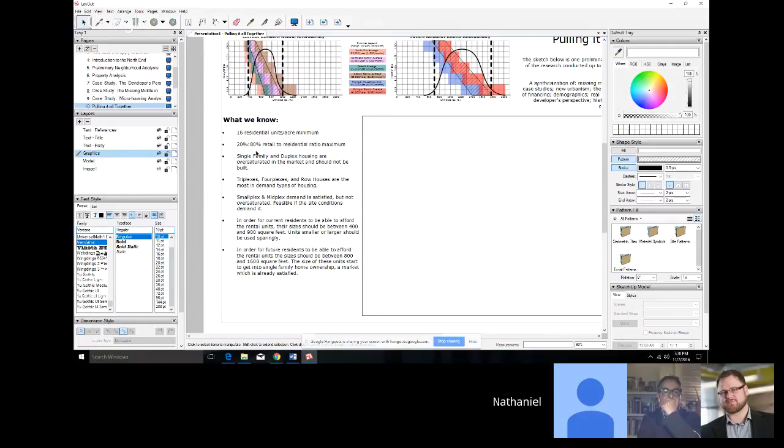So then I combined all this together. We know we want 16 residential units per acre minimum based on Andres Duany's recommendations for a successful neighborhood. We know we have a 20% to 80% retail to residential ratio for financing purposes. And from the market analysis research from Jim Tischler, we know single family and duplex are oversaturated and shouldn't be built if we can avoid it.

Triplexes, fourplexes, and row housing are the most in demand. And we know that small plexes and midplexes are satisfied, but if we built one we could probably consider it feasible because they're just satisfied, not oversaturated.

And then down here, I just said unit sizes, and I put together my original thought process here. So that is as far as I got in terms of graphics.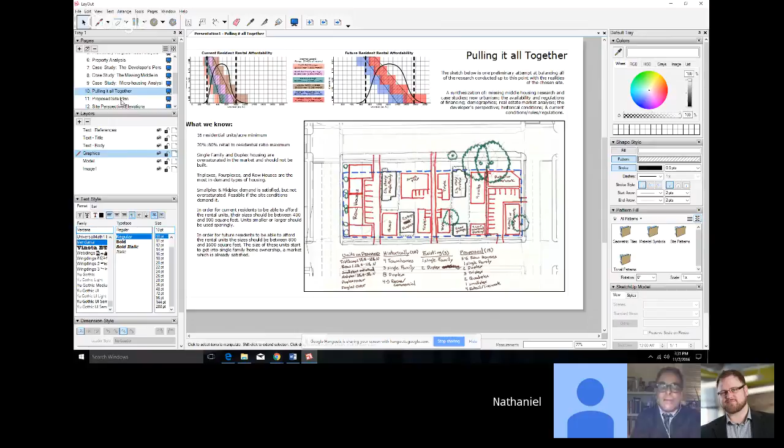It's not just that there's less floor space. It's a discussion about designing the floor space and the volume in such a way that it's not an apartment, it's not a supermax prison cell, it's not even a dorm room. It's a unit designed to maximize storage and integrate built-ins, like window seats to replace couches.

So there's thinking about how to create a space that is well designed and affordable to run and live in, that doesn't break the bank just to move into—like having to go to IKEA to buy a couch, or to get end tables and things like that.

It's thinking about these things as storage opportunities as much as anything. You see that in Airstream trailers, you see that in motorhomes, you see that in dormitories today, and now you're seeing it in these things. It's going to be interesting to see if these get absorbed.

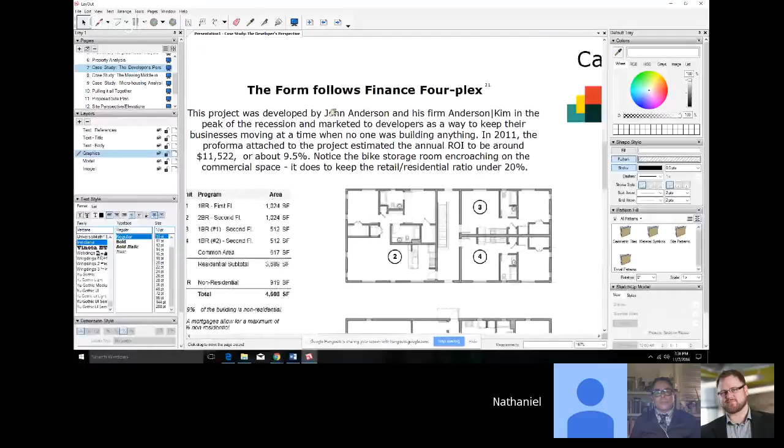It's just like I need that much desk space. So it wouldn't work for me either. But if these were desks, I still wouldn't have enough desk space. Yeah, you'd probably put a piece of wood over the bed so you could put chairs up against that and draw. I've got 2 desks here, and sometimes I'll pull the table that's behind me over, and I've got a bookshelf over on my right, so I've got all the paper and utensils we use to do the work that we do.

No, that's sort of the other thing, like some of these rooms could have like... it takes the right person to need something like this. That's right. Well, cool, this is really good. I think this is really good research that builds your case pretty effectively. That's what I was hoping, and I'm glad you did it.

They've created this sort of thing to get people to bite into it, to accept it. They're kind of like apostles, so they've got to do stuff like that. Based on the quickness and effectiveness of the response, I'd say he's paying somebody just to maintain and respond to inquiries on the website. Yeah, that's pretty impressive.

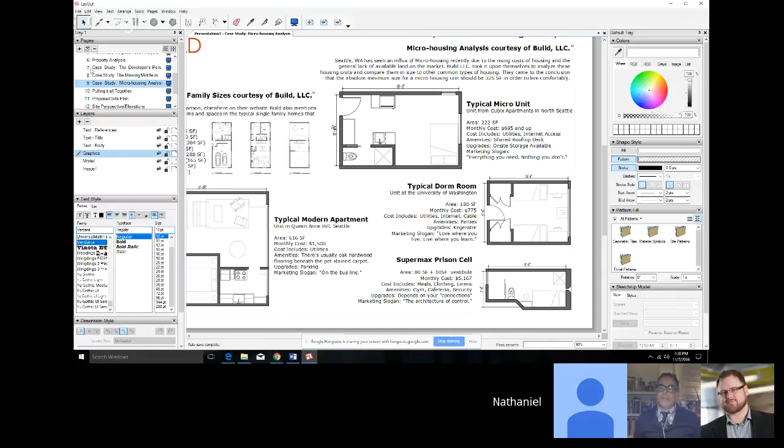So obviously my next step is to put this aside and really start developing the floor plans, site plan, and three-dimensionality. I probably won't get all that done in a week.

Right now, are you and Mateo and his friend going together to Cincinnati? How are you guys getting down there? I thought Anna was going, but okay, I was going to message them and see if they wanted a carpool down there. I haven't done that yet, but let me know what you guys decide, because I have room, but I'm staying on campus.

You're staying on campus? There's a hotel on campus, the Marriott, right next to the Frank Gehry building. I'm staying there. It's a bit more than 120 a night, probably 100 more than that. I don't know if you want to stay there, I wouldn't advise it, but there are other hotels. Maybe there's a student rate, or maybe you guys can all stay together.

Well, it depends on whose friend it is. If it's his girlfriend, then maybe not. I'll message him and see what happens. Find out and let me know if you guys need me for anything. Okay, cool, we'll talk later, bye, thanks.

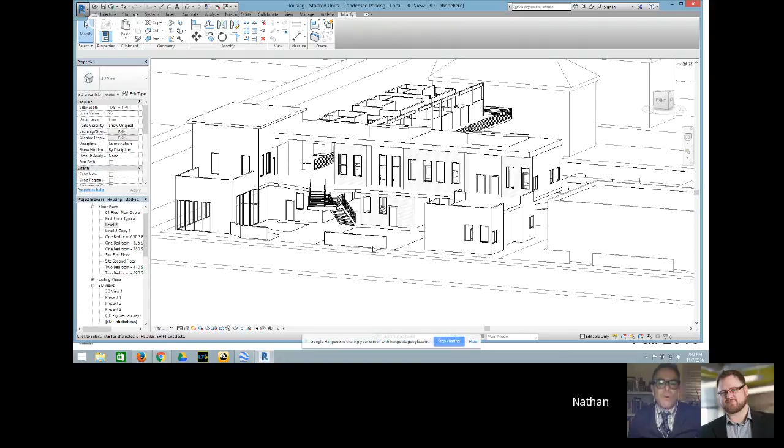There's a rhythm in the second floor units, a rhythm of double windows and then double doors, and you've got those pop-ups over the doors. Correct, this wall carries through. But what's behind those doors? Living room space? Yes, and it's shared.

Have you thought about flipping the living room with the kitchen? No, just because look at the size of the living room and the fact that you're walking into it and getting into the bathroom from there. I also might move the bathroom door to the opposite wall so it's closer to the bedroom, and maybe not have the bathroom off of the kitchen. Since only one or two people are living there, maybe the door goes right from the bedroom into the bathroom. But I think the kitchen needs to be off of the front door, in the smaller geometry.

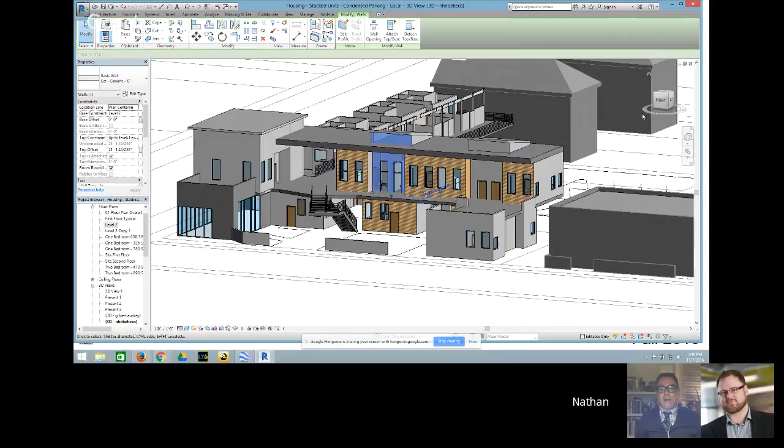Also, the pop-up should be as wide as the gray wall below. It should not dog-ear out, it should be only that trim. And I would let the facade of that gray clerestory interrupt the roof line, so bring the roof back and interrupt the fascia.

So the roof would return? Yes, does it return back into the dormer? Yeah, into the dormer. I'd still want some sort of covering over the doors, but it could be a different material, a different elevation. It could be a suspended canopy like you saw tonight, or one sheet of glass on a couple of brackets, or corrugated metal that spills out over the walkway. I'd look at that because right now the roof is a really heavy condition, the fascia height is really tall, and it's really heavy for something so small.

Also, if the living room is in the brown bits, it opens it up to the outdoor corridor and to the north facade. Yeah, I like the idea because I thought about wrapping the windows around the corners. But the kitchen, having the casework there and usable counter space, I didn't want too much glazing into it. Don't need a lot of glass.

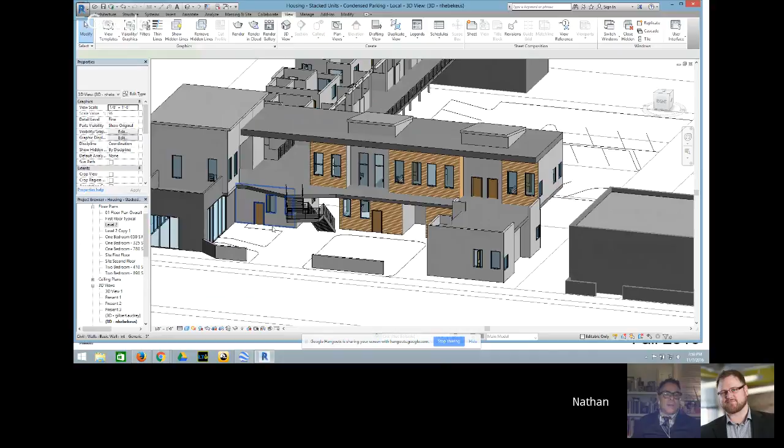There could even be a hole in that second floor that looks down onto the ground below. It would have its own railings, to bring some of that light through to the first floor, unless there's a room under there. I'm not sure what's happening. Yeah, I have a unit on the first floor. I kind of lost the width there, especially on the first floor, but now I see that area. It's kind of an alley. You might be able to push that L north a little more, closer to the alley, and it might be worth looking at that.

Very interesting. I think the decision of the kitchen-living room swap needs more thought. Does that come into play in all those units? I think it does, doesn't it? Yeah, they're all similar. And so on the south units that are on the corner, those are bedrooms right on the sidewalk? Yeah.

I didn't know how these ones become. So that's interesting, right? The front doors face Brush Street. What is that, Smith down below? Or Custer? Beaubien? No, the South Street. Isn't that Beaubien? That runs north and south. Does it? Bethune. Bethune, yeah, that's what I'm thinking.

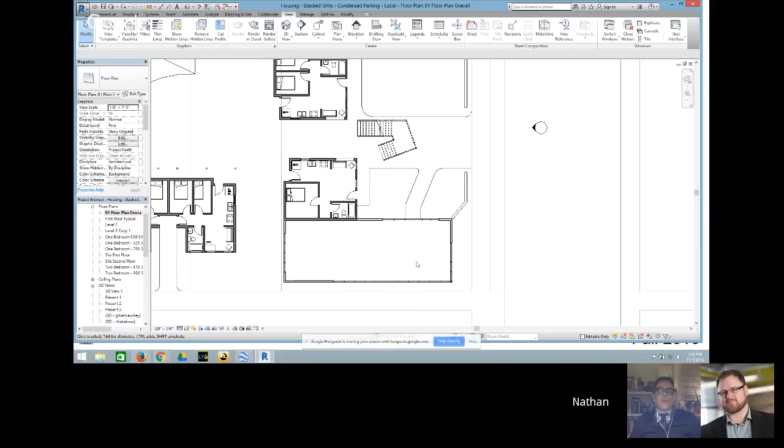So I think I need to start working on some areas where I want to bump this out. That'll help my kitchen—well, actually that'll be the bed if I flip-flop them, that'll be the living room. And help turn some of my materials because I want to.

That's the other thing those little one-foot, two-foot bump-outs do—they allow you to die one material into another, allow for material changes. You don't have to do it everywhere, just try to be strategic about it. That's why, doing windows in the corners, for example—although I typically don't do a lot of windows in corners—but from a design perspective, doing them in the corner allows you to make dramatic material changes at corners, at edges.

But your building has a ton of corners, so it's going to be hard—going to be challenging to stay in control.

I think my next steps, I'm going to start looking at developing my—let me get the first floor—developing these spaces, and the programming on what's going on. So I'll need some case studies for that.

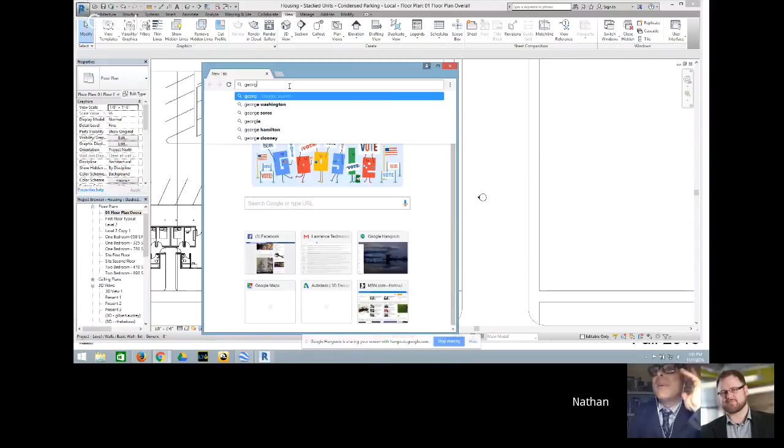Well, have you ever looked at—let's see, how about—let me see if there's any images of things you could look at. Okay, so I'm going to screen share. I want you to type in George Hargreaves. I'm going to screen share now because I want to show you—oh, unless you pull it up. So go to Images, and go to third row, second picture.

That's fine, I'm looking at that too. Right, click on the second thumbnail. See where I'm taking you? Think of ways that you can, or even the second thumbnail beneath.

It's a big outdoor office-y complex there. Look how simple that one gesture is - a raised lawn area with a diagonal that returns back to the walkway. Just 3 different materials: sod, pavers in the traditional European radiating pattern, and then concrete with benches on it.

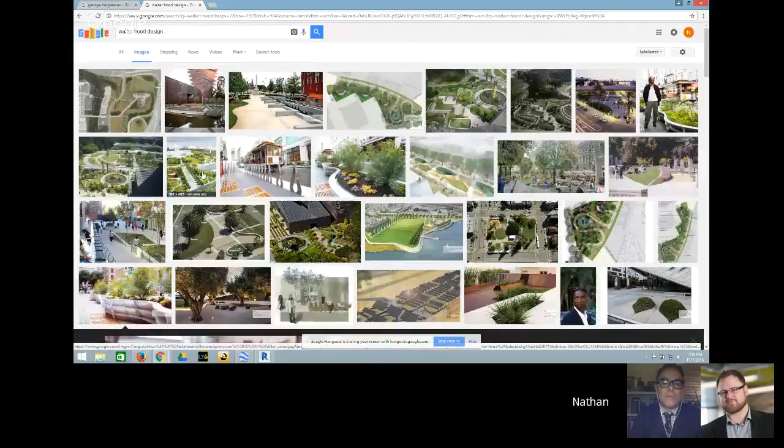If you go to... which one is that? Now I can't find it. Go to that one - you just had it, the big large one. Yeah, go to... gosh, I'm not seeing the same one. Go to the first image in the second row. No, I think we have different ones up right now. Let me screen share this with you so you can see it. Can you see that?

So, again, this is just a raised lawn panel in an elliptical shape, just a stone wall, with colorful materials, and then really no nonsense chipcrete or pea stone as a pathway with some sculptural elements in the middle. So there's simple ways, I think.

Here's another lovely one, this roof garden upstairs. Think of each of these as kind of like the walls in the roof garden. This was what I was talking about - letting the ground plane influence the architecture, let it turn up.

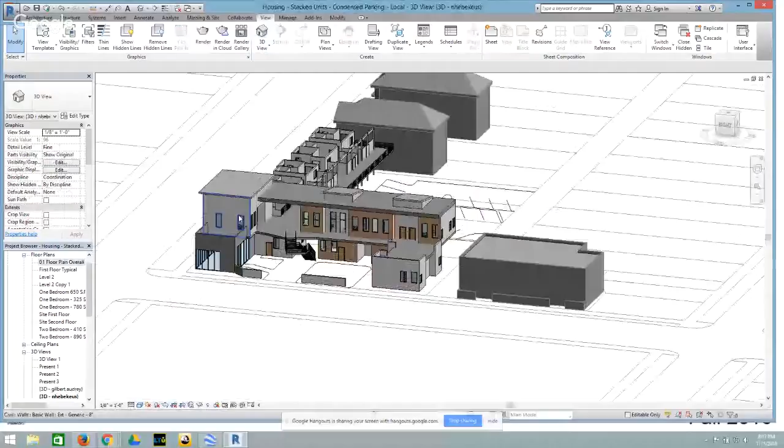Let's go back to your drawings for a second. You said something about the roof on the townhomes being—yeah, I ripped them off. You ripped them off because I'm rethinking what they need to be.

The plate height for all of the walls in those cubes is consistent. Let's revisit that—remember how we just talked about the living rooms and the kitchens, extending the kitchen wall plate height to be 4 feet taller than the ceiling, for example, to give privilege to light within those spaces, but also because the elevation needed it, right? It just needed that relief.

You've seen lots of examples from me this semester—I've shown you some residential stuff. But this view that I'm going to show you right now, you saw it tonight. It's got two different things happening: one thing, the big brown thing, is obviously 3 stories and 2 stories, but it's reading like one building with another building up against it. So the idea of cladding the building into two different units is one option you might want to think about.

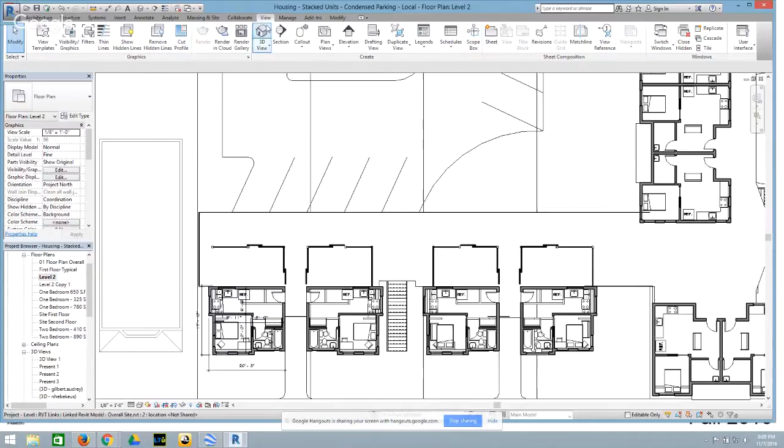Once I get up to the second floor, I have a little bit more variation in the form, which I was thinking—maybe the bedrooms pop up above everything else. Yeah, because this mass would start to read a little bit taller—this cube here.

I think it would help to elevate some of this, and then have different planes rather than one roof plane—maybe multiple. I don't think it's one roof plane. It's probably not any gables either. I think that's something you have to restrain yourself from doing what you think it needs to be. You have to push yourself on this vocabulary.

I don't know if you're comfortable working in what I might call a modern vocabulary. Does your office do this kind of work? Not residential—we usually have a design firm that we bring in to consult with, and they do the elevations and the units. We just do the CDs for them. Yeah, sure, no, I understand.

Initially I was thinking this feels like it could have a gable, but I don't think it'll work. Well, it could be that those two units are also one roof. And then it might be a flat roof, it might be a hip roof. That might be worth thinking about.

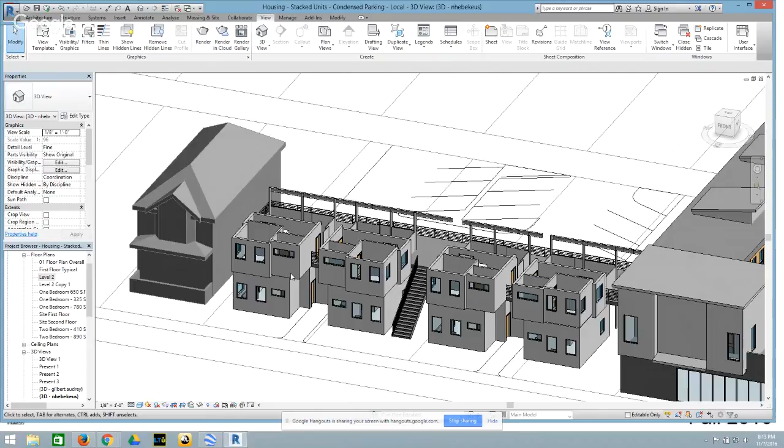So I'm going to screen share again. I'm going to show you something.